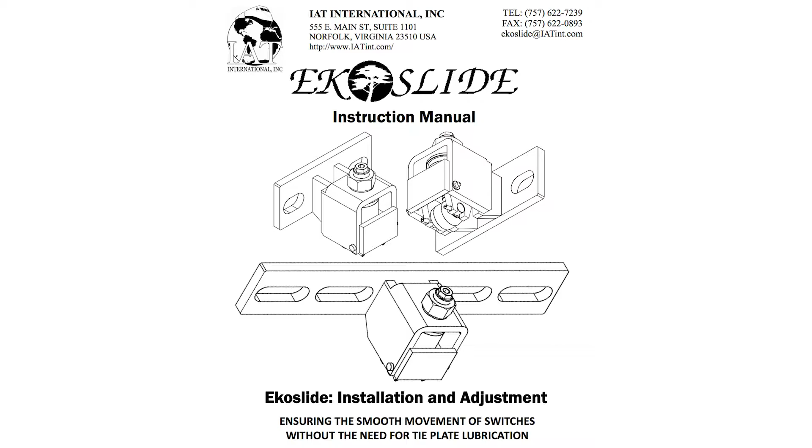Now, to get us started, I want to use the Ekoslide instruction manual to point out a few important points. Number one, on page 3, you'll see the list of recommended tools. And it's handy to review this before you go to do any sort of installation with Ekoslide. They're not all required. Ekoslide can very much be done with a couple wrenches, but it would be ideal to have this complete list with you if possible.

Page 4 here, and pages 4 to 6 are the pages that are going to determine your configuration. So by that I mean, if you've got a short switch, let's say a number 8, a number 10 or a number 11, then you're going to need 4 Ekoslides, or 2 per side. If you've got a number 15, you're going to need 6 Ekoslides, or 3 per side. And if you've got number 20 or even number 24, then it's 8 Ekoslides, or 4 per side. So just know the length of your turnout determines how many Ekoslides you need.

Now the basic idea is you want to lift up your entire switch point. So if you need to lift up your entire switch point, that means you don't just need the proper numbers, but you need to space the Ekoslides evenly throughout so they're actually lifting up the entire switch point.

One important rule, which you see at the bottom of page 4, is the 4 and 4 rule, which means you want to make sure your first set of rollers are on the 4th tie or closer to the front. So ties 1, 2, 3, or 4, preferably 1 to 3, but at least not further back than tie 4, or else you'll have too much drag in the front.

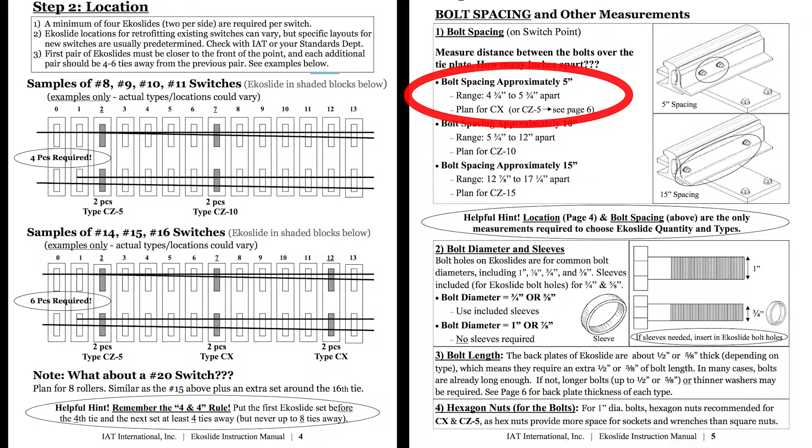Moving on to pages 5 and 6 together, you're going to see that the Ekoslides that you use are determined by the bolt spacing. So in AREMA standard turnouts, your most common bolt spacings are 5-inch, 10-inch, and 15-inch bolt spacing. So for that reason, you've got 3 primary Ekoslides: a CX, a CZ10, and a CZ15. CX is for 5-inch bolt spacing, CZ10 is for 10-inch bolt spacing, and CZ15 is for 15-inch bolt spacing.

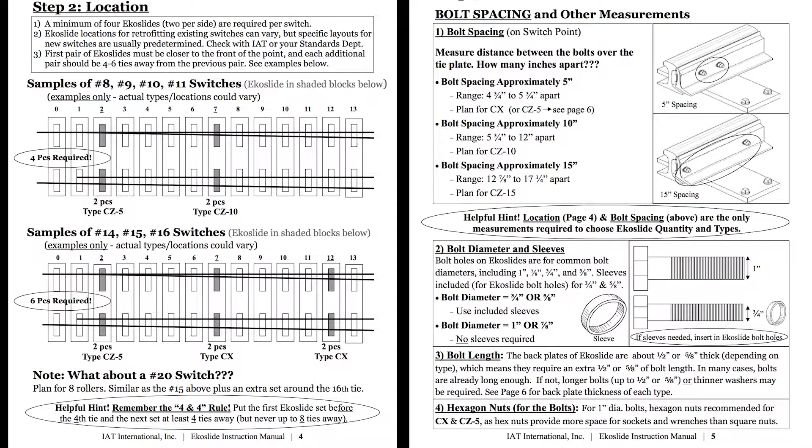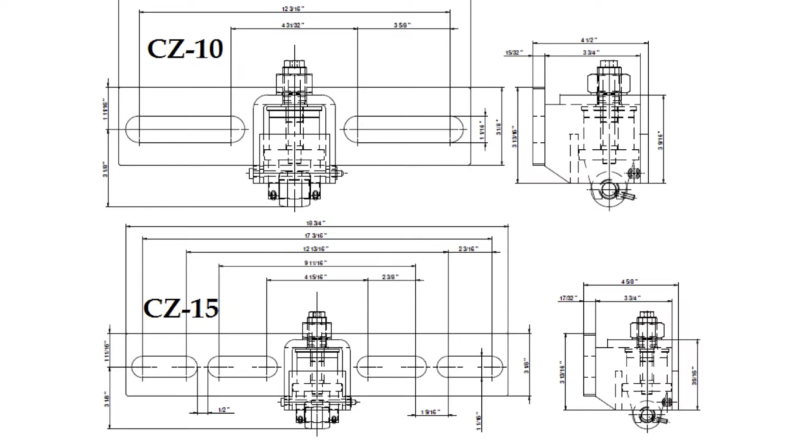And this shows you again not just the standard bolt spacings, but you can see with the CZ10 and the CZ15 you actually have a lot of flexibility with these elongated holes and where you place Ekoslide.

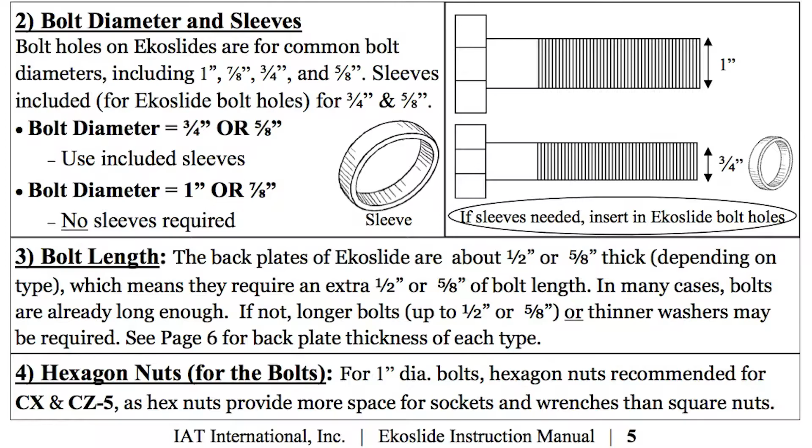Continuing on the bottom of page 5, I'd just like to point out the sleeves. These sleeves here are to handle different bolt diameters. Two little sleeves are included with each roller. If you have 1-inch diameter bolts, you do not need the sleeves. But if you have 3/4-inch diameter bolts or 5/8-inch diameter bolts, then you should insert these sleeves in the Ekoslide bolt hole so that you don't have so much play in there when you tighten down.

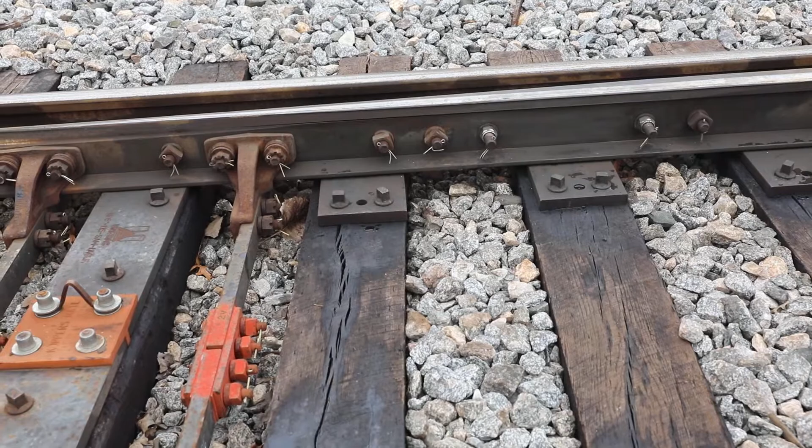When you're going to a turnout to retrofit with Ekoslide, what you're looking for is how the bolts are lining up over the ties. So similar to when I first started explaining on page 4 of the instruction manual that you need to get the proper number of Ekoslides for that switch, I then go on to say you want to get the first set in one of the first 4 ties. By that I mean you need to see where the bolts are lining up over the ties so that you can get the roller to firmly roll on the tie plate.

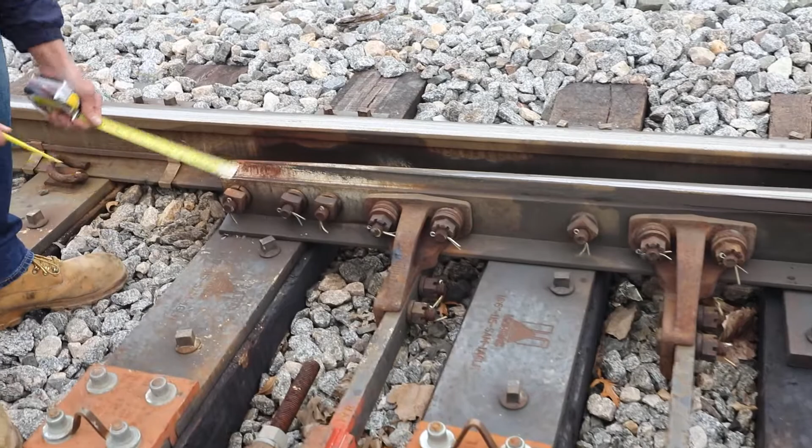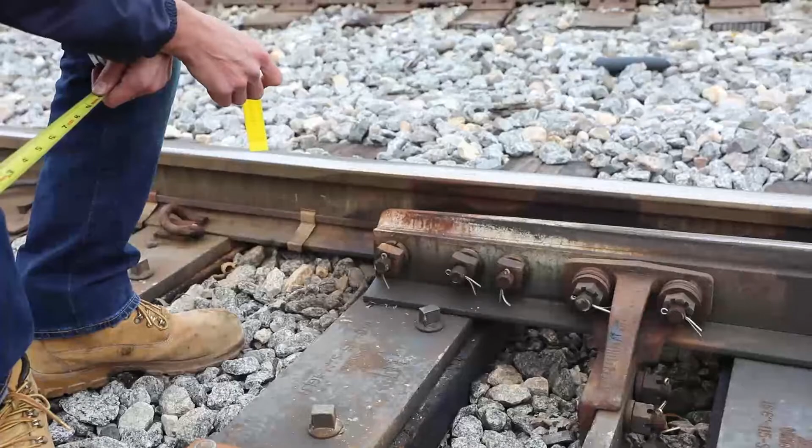Looking at this first one here, you can see that this first location could be an option for installing Ekoslide for the simple reason that you can put a roller right here and then it has room to slide. And you've got to have 2 bolts somewhat lined up over that tie. Moving on here, tie 2 is not an option because you only have 1 bolt here, so there's no way you could secure an Ekoslide. Same thing on tie 3.

But now I come to tie 4, and tie 4, you see there's a plate right between the bolts, and if you measure, we're right at 15 inches. So this is an excellent example of where you can use a CZ15, which is the longest one, that covers that 15-inch center-to-center bolt spacing. This is an excellent example.

Moving on to the 5th tie though, this fifth tie is not an option, there's no bolts. Neither is the 6th. The 7th tie could theoretically be used, but you've got rivets here. So in this case, to use it, you'd have to cut the rivets and put bolts in instead. And then the last one we'll talk about is tie 8. Again, these stops are always a great option because stops are almost always 5-inch bolt spacing and they're lined up over a tie plate the vast majority of the time. So it's very common for your last location to be where the stops are located.

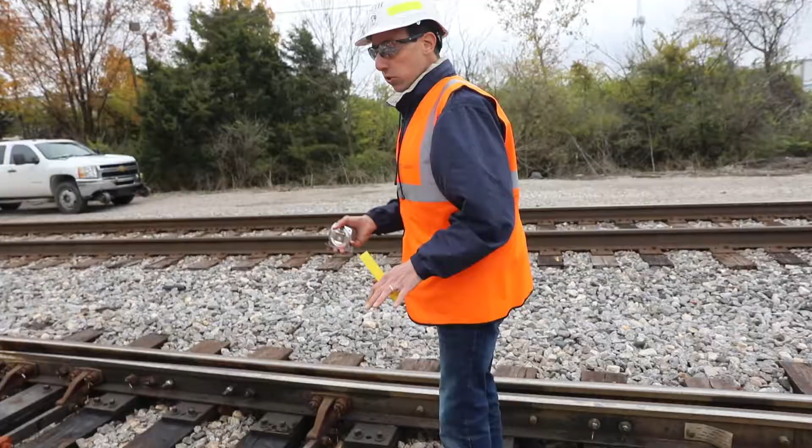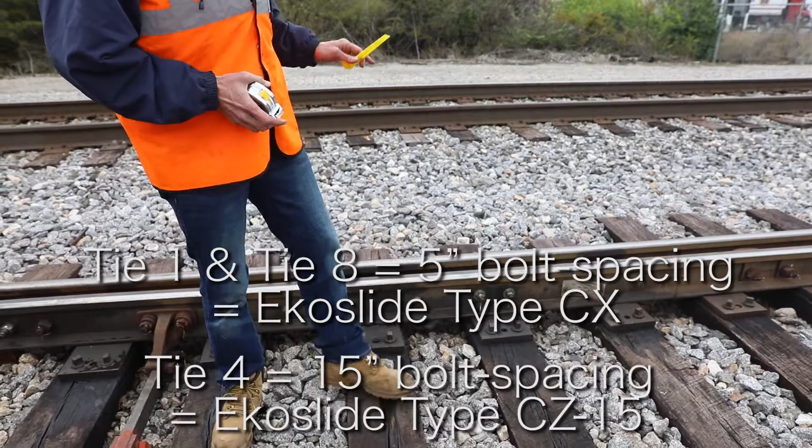To summarize what we just identified, there's 3 possible locations for Ekoslide on the switch. We've got the first tie, 2, 3, 4, the 4th tie, 5, 6, 7, 8, and the 8th tie. So we've got 3 possible locations, and 2 of them have 5-inch spacing, which is going to be a CX in this case. The other location is tie 4, where we're going to use a CZ15, which is the long one.

Now, going back to the discussion about CZ5 versus CX, as these have your standard AREMA bolt height of 2 7/8, we're only going to need CX. You use CZ5 in the cases where you have 2 3/8 ABR drillings. These are 2 7/8, which tells you you have your normal standard height. You don't need to worry about the short CZ5 type. CZ5 is only for 2 3/8 inches.

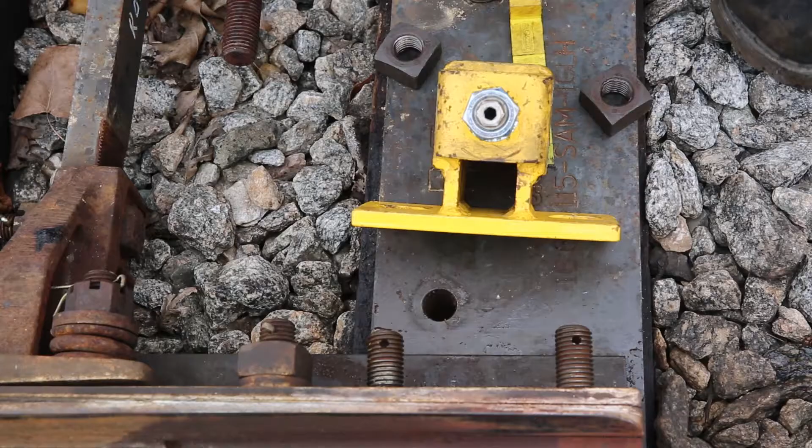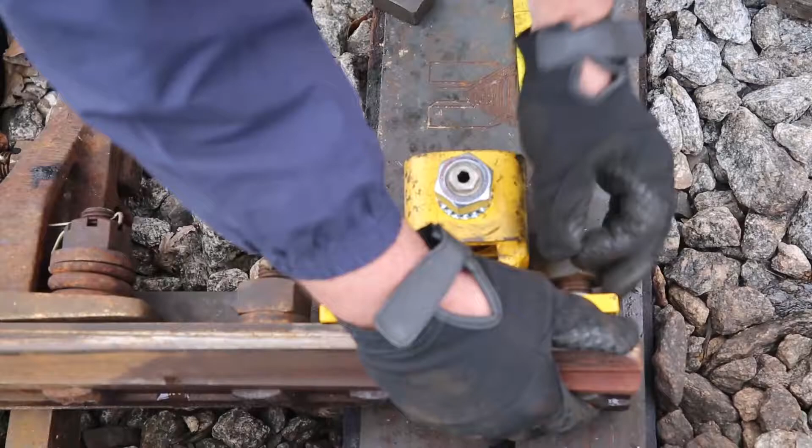As you install the CX or the CZ5, notice that you need to shift it back and forth to get the washers and then the nuts on. This is completely normal, so just know as you tighten down, particularly with 1-inch diameter bolts such as these, there's not a lot of wiggle room. So just do a few turns and shift the Ekoslide back and forth to tighten it down if you have a tight fit.